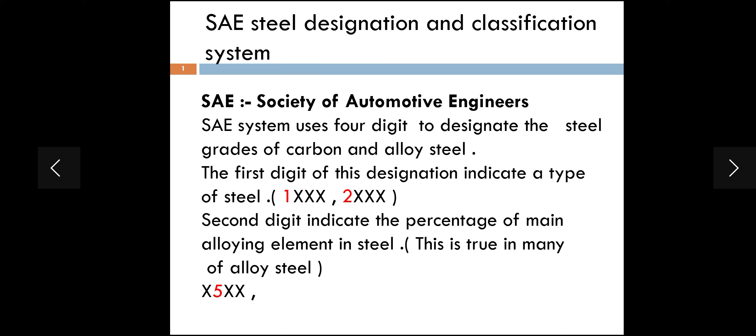Video subject is SAE Steel Designation and Classification System. SAE long form is Society of Automotive Engineers. SAE system uses 4 digits to designate the steel grades of carbon and alloy steel. The first digit indicates the type of steel, the second digit indicates the percentage of main alloying element, and the last 2 digits indicate carbon percentage.

There are certain types of alloy steel that are designated by 5 digits. If the carbon percentage is 1% or more than 1%, in such cases there are 5 digits, and the last 3 digits indicate carbon percentage.

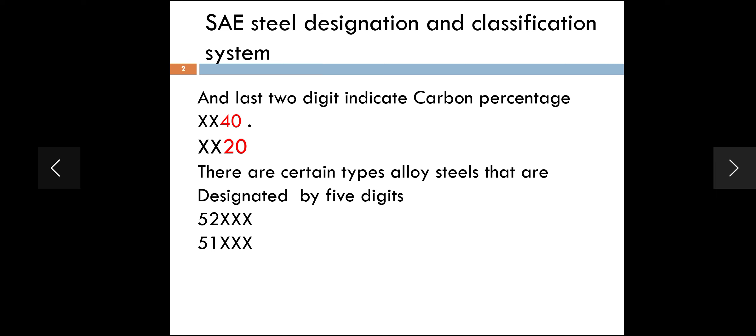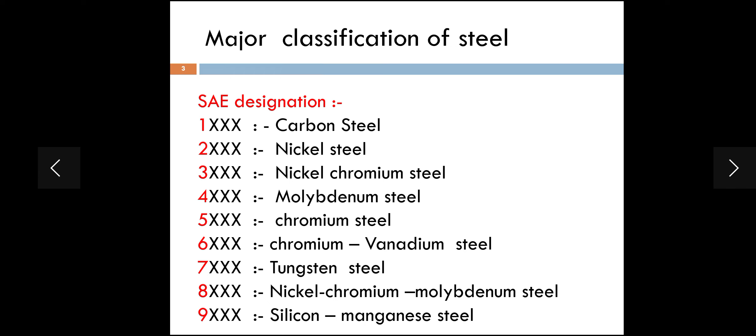So major classification of steel, as per this system, the first digit indicates the type of steel. First digit 1 means carbon steel. First digit 2 is nickel steel. 3 means nickel chromium steel. First digit 4 is molybdenum steel. 5 is chromium steel, 6 is chromium vanadium steel. First digit 7 is tungsten steel. First digit 8 is nickel chromium molybdenum steel, and first digit 9 indicates silicon manganese steel.

Now we start with the carbon steel. There are 4 subcategories in carbon steel. First category: first digit 1, second digit 0 is plain carbon steel, where manganese percent is less than 1%.

Second subcategory is first digit 1, second digit 1, resulfurized free machining steel. Next category, first digit 1, second digit 2 is rephosphorized free machining steel. Then fourth category of carbon steel is first digit 1, second digit 5. It is also plain carbon steel, but in this steel manganese percentage is more than 1%. Then first digit 1, second digit 3 is manganese steel.

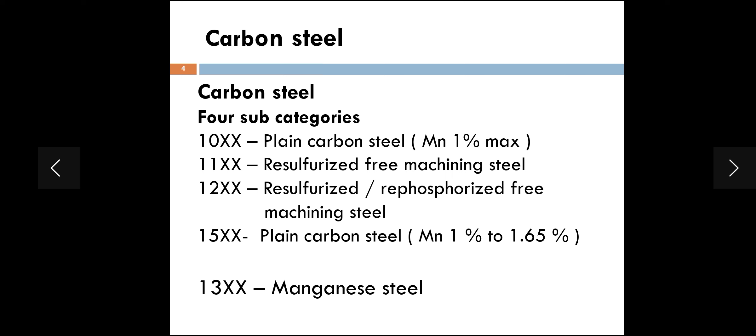So we'll start from the plain carbon steel. One example of plain carbon steel is SAE 1017. As per this system, first digit 1, second digit 0 means it's plain carbon steel, and the last 2 digits, 17, indicate carbon percentage. So 0.17 is the carbon percentage in the steel, and manganese present in the steel is 0.3 to 0.6%.

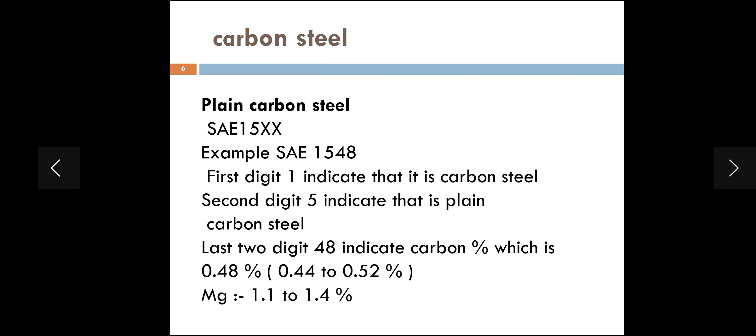Again, the plain carbon steel designation example is SAE 1548. In this plain carbon steel, manganese percentage is more than 1%. That's the difference. As per this system, first digit 1, second digit 5 means it's plain carbon steel, and the last 2 digits, 48, indicate the carbon percentage, which is 0.48% of carbon, and manganese present in this steel is 1.1 to 1.4%.

Now next subcategory of carbon steel is resulfurized free machining steel. In all steel, sulfur is present as an impurity, but the maximum allowable value of this impurity is 0.04%.

Here, the name is resulfurized free machining steel. Sulfur is intentionally added in the steel. If you add the sulfur, it improves the machinability. So example of the steel is SAE 1141. Here first digit 1, second digit 1 means resulfurized free machining steel, and the last two digits, 41, indicate the carbon percentage, which is 0.41% of carbon present in the steel.

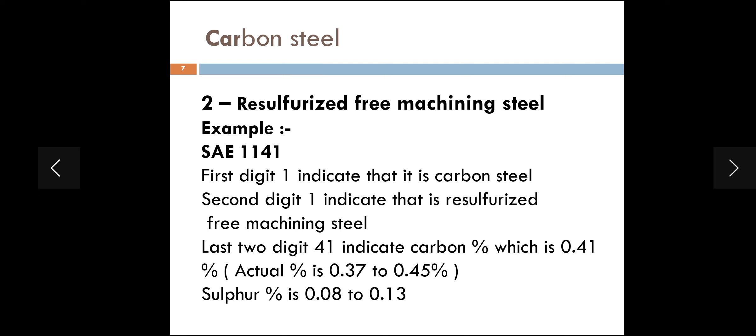Now, next carbon subgroup is resulfurized, rephosphorized free machining steel. Here again, sulfur as well as phosphorus are also present in all steel as an impurity. The maximum acceptable percentage for sulfur and phosphorus as an impurity is 0.04%. If you add sulfur in steel, it improves the machinability. If you add phosphorus in the steel, it improves the strength and corrosion resistance.

So example of resulfurized, rephosphorized free machining steel is SAE 1212. As per SAE system, first digit 1, second digit 2 means it's resulfurized, rephosphorized free machining steel. Last two digits, 12, indicate carbon percentage, which is 0.12%. The sulfur percentage in the steel is 0.16 to 0.23. Phosphorus percentage in the steel is 0.07 to 0.12%.

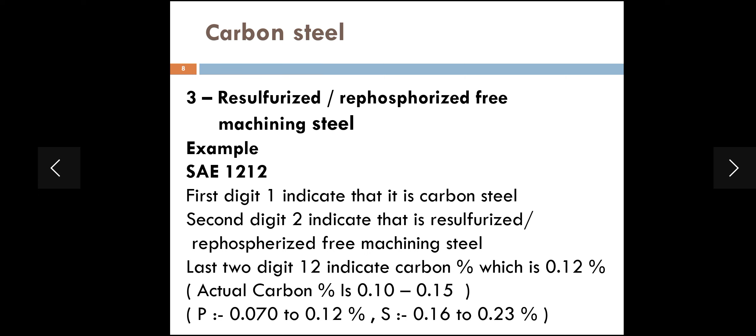Now, manganese steel. Manganese is also present in most of the steel up to 0.3%. If you add manganese in the steel, it promotes greater strength by increasing hardenability. So example of manganese steel is SAE 1345. First digit 1, second digit 3, as per system, is manganese steel. And last two digits, 45, means carbon percentage in the steel is 0.45%. Manganese present in the steel is 1.6 to 1.9%.

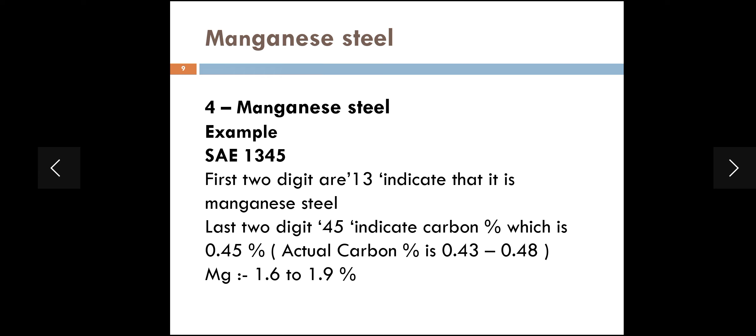Now next is nickel steel. So now carbon steel is completed. Now we started the alloy steel. So first alloy steel is nickel steel.

SAE23 and SAE25 are nickel steel grades. If you add nickel in steel, it increases the hardenability, increases toughness and ductility. So example of nickel steel I have taken here is

SAE2545. So as per the designation system, first digit indicates the type of steel. Here 2 indicates nickel steel. Second digit is 5, which indicates percentage of principal element present in the steel. So nickel is the principal element, so 5% of nickel present in the steel. And last two digits are 45, means 0.45% of carbon.

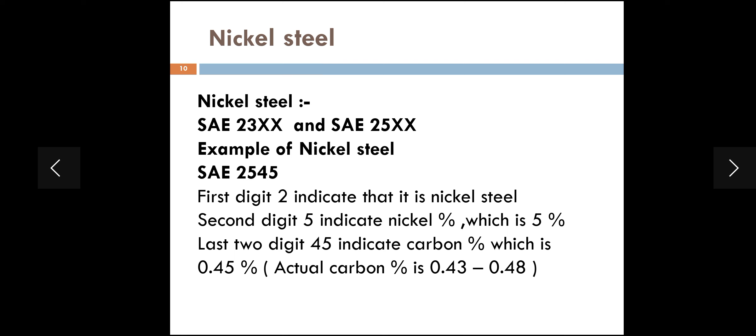So next is nickel chromium steel. SAE31, SAE32, SAE33, SAE34, these are nickel chromium steel grades. So one example of this steel is

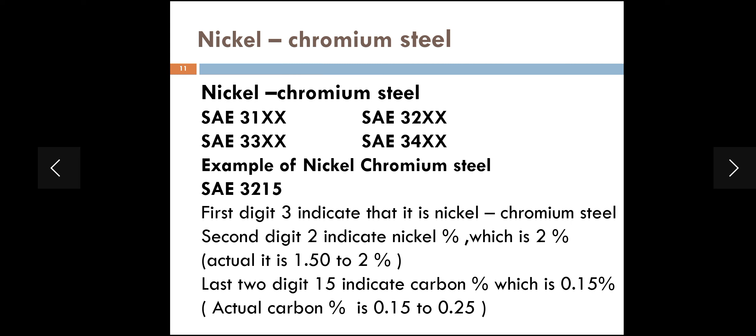SAE3215. First digit 3 indicates that this is a nickel chromium steel. Second digit 2 indicates principal element percentage in the steel, so it is nickel percentage in the steel, 2% of nickel. And last two digits 15, that is the carbon percentage in the steel, which is 0.15%.

Now next is molybdenum steel. Please note, maximum molybdenum in any steel is never more than 1%. Maximum is 1%. So because of moly, it increases the hardenability and at elevated temperature, improves the corrosion resistance.

Example of moly steel is SAE4422. First 4 indicates type of steel, so 4 is it is a molybdenum steel. Second 4 indicates moly percentage as a principal element in the steel, the 0.4% is moly. And last two digits 22, that is the carbon percentage, which is 0.22% of carbon.

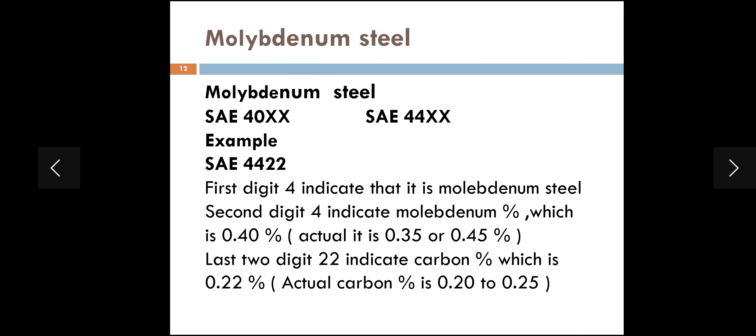Now chromium steel. SAE50, SAE51, SAE52, these are all the chromium steel grades. So chromium increases the hardenability of steel, improves corrosion resistance, improves wear resistance. Example of chromium steel is SAE51100,

51100. So from this designation, what do you understand? First digit 5 means it is a chromium steel. Second digit 1 indicates chromium percentage, there's 1% of chromium in the steel. And last 3 digits 100 indicate that 1% of carbon present in the steel.

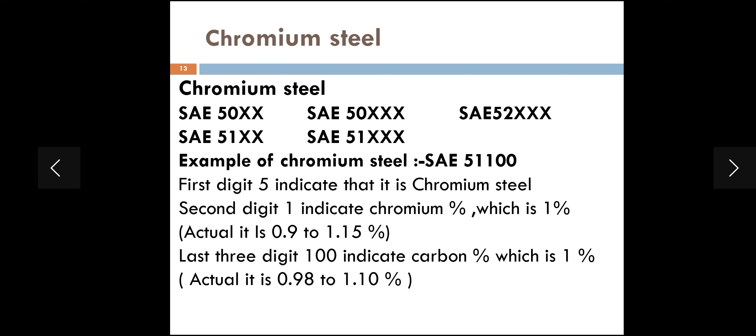Now next steel grade is chromium vanadium steel. Example of this steel I have taken is SAE6118. Here first digit is 6, it indicates that it's a chromium vanadium steel. Second digit 1 indicates chromium percentage in the steel is 1% of chromium. And last two digits 18 indicate carbon percentage, there's 0.18 carbon percentage in the steel.

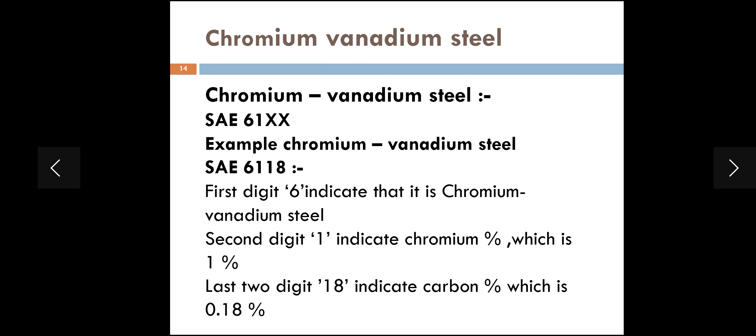So steel grade is tungsten steel. If you add tungsten in steel, it increases the hardenability and yield strength, also improves the mechanical properties. So SAE72 is tungsten steel grade. Example of tungsten steel I have taken is

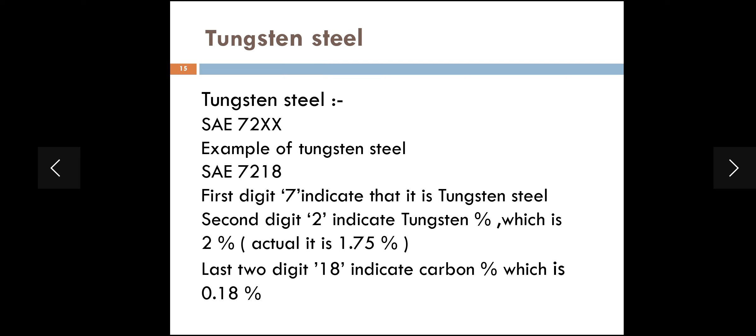SAE7218. So from this designation, what we understand? First digit 7 means it is a tungsten steel. Second digit 2 indicates tungsten percentage in the steel is 2% of tungsten, and last two digits 18 indicate the carbon percentage, so 0.18 is carbon percentage.

Now next steel grade is nickel chromium molybdenum steel. SAE81, SAE86, SAE87 and SAE88, these are the nickel chrome molybdenum steel grades. Example of this steel I have taken, SAE8620. So first digit 8, that means it is a nickel chromium molybdenum steel.

Second digit 6 indicates nickel percentage, which is 0.6% nickel in the steel. And last two digits 20, that is the carbon percentage, the 0.2 is the carbon percentage.

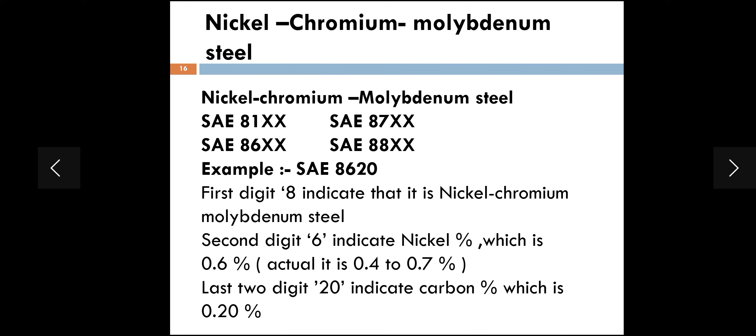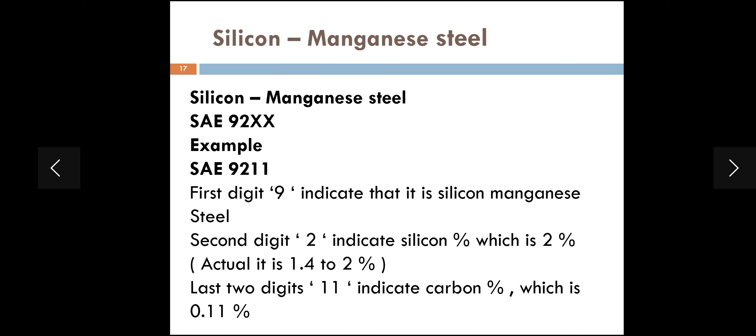Now silicon manganese steel. SAE 92 is a silicon manganese steel grade. So here first digit 9 indicates that is the silicon manganese steel. Second digit 2 indicates silicon percentage in the steel, so 2% of silicon. And last two digits are 11, indicating the carbon percentage, so 0.11 is the carbon percentage in the steel.

So this is all regarding SAE steel designation and classification system. I have included only major steel grades in this video. I think this is a very user-friendly steel designation and classification system. We get basic idea regarding steel with its designation, but for detailed chemistry, you need to refer the SAE handbook.